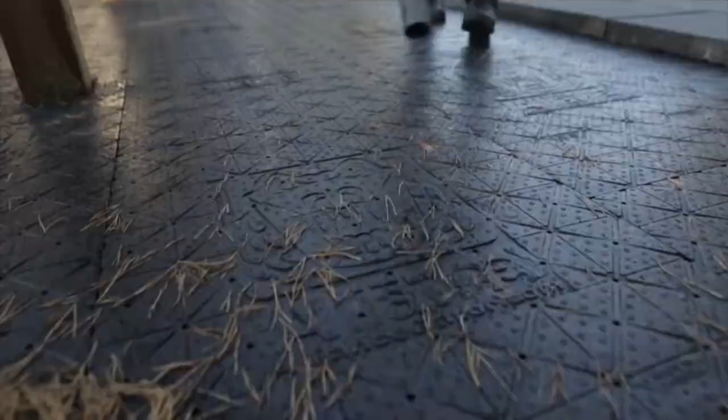All right, I can't get enough of that video, it really pumps me up. But this whole 4 equals 5, Mike, tell us what that's about. Well, Gator Base is a game changer. We really feel that you're going to save tons of time when doing a Gator Base installation. So the work that you normally did in 5 days, you can get done in 4 days if you use Gator Base.

Yeah, so 20% labor savings with Gator Base. That's really the wow factor in Gator Base. Let's talk about really how we get to that labor savings, so talk about the concept. Well, it's really simple, Gator Base replaces 6 inches of crushed compacted stone base material. So you're not digging out all that soil. Yep, you're not bringing in all that crushed stone. Awesome, and I think we got a cross section here, if Ryan will bring that up on screen, I think this will better explain what you're talking about here.

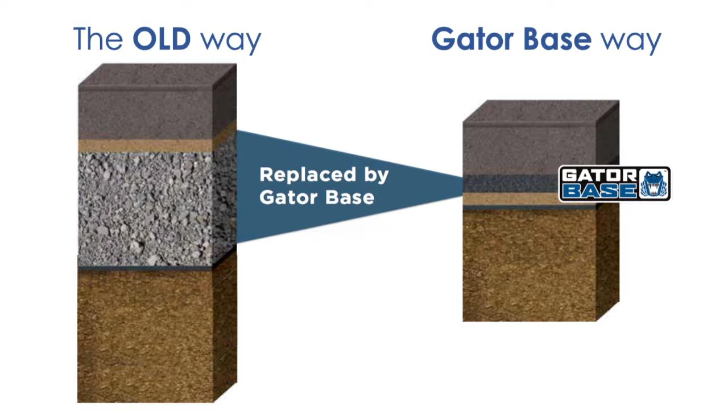Right, so now we've got a foam board that is going to give you load distribution. It's going to give you an insulative value. It's going to replace that crushed stone for structural purposes. So now we don't need all that rock underneath our patios to support that and give it a long-lasting, settlement-free type of installation. Awesome, so we've got that, and we'll talk about some other labor savings time, but we're really talking about saving you labor on a job site.

And the concept also extends into that load transfer. Right, we want to spread that load over a larger area, right? You step in a wet, soggy, swampy area and you sink in. But if you stepped on a 2-foot by 3-foot Gator Base panel, you wouldn't sink in. It's kind of that snowshoe effect. So the ground doesn't feel quite as much of a force as it normally would. Yeah, and so that eliminates a lot of excavation, a lot of labor, and leads to ultimately faster jobs.

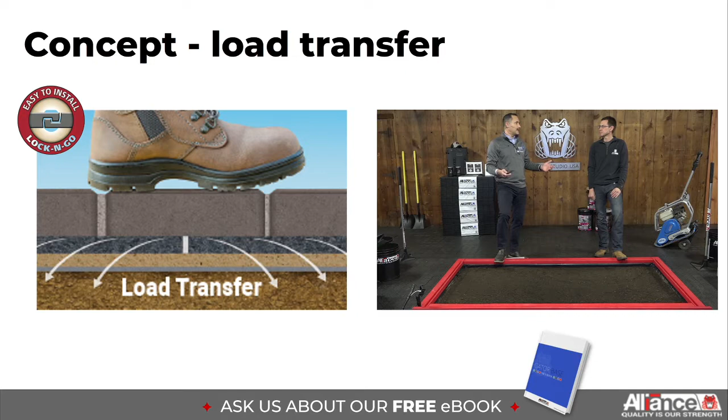Another great benefit of Gator Base is the insulation factor. Gator Base is foam, and foam is a great insulator. What causes movement and problems in our installations? It's typically freeze-thaw in these northern climates. So if we can minimize the number of freeze-thaw cycles, we're going to come out ahead. Less movement, less potential for frost heaves.

Gator Base has an R value of 3.6 per inch. That's equivalent to 16 inches of crushed stone. That's a lot. So you get a great labor savings, plus you get the added benefit of insulation. So you ultimately get a better installation. Not only is it a faster installation, but it is truly a better installation. We've got millions of square feet in the ground, no callbacks, no problems.

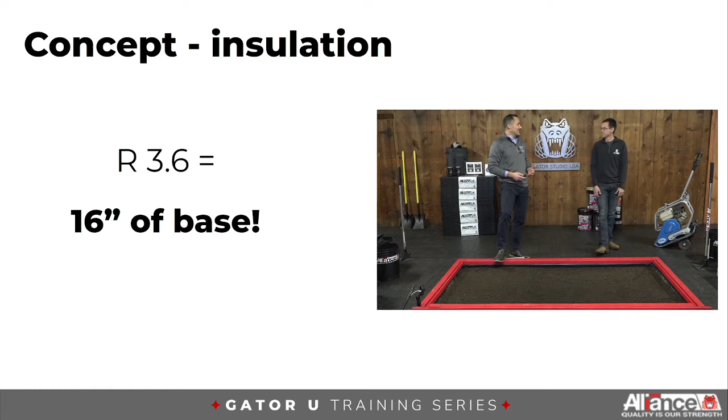It really is a simple, fast, fantastic solution for installing pavers. Well, enough about the concept. I think a lot of people want to see how it really works, so let's get into that installation process. Well, that's the beauty of it, it goes really quickly. So what do we need to talk about? Where do we start? Well, we're going to start with our excavation.

The first thing you got to do on any project is dig a hole. Okay, so we've got a hole here dug. Mike, what are the lookout or watch-outs we have to consider during the excavation phase? Well, I know contractors, they love to go out there with their skid steers and excavators and dig 12 inches, 6 inches, without even thinking about it. Way too much. We only need 4 inches. So have a little bit of care as you go out there. Don't over-excavate, that's probably our most common problem.

If you over-excavate, you can't just compact that leftover soil. You need to bring in some stone and compact it. So pay attention to your grades, and really, you're only taking off the sod, the top layer of grass and root mass, and you're ready to go.

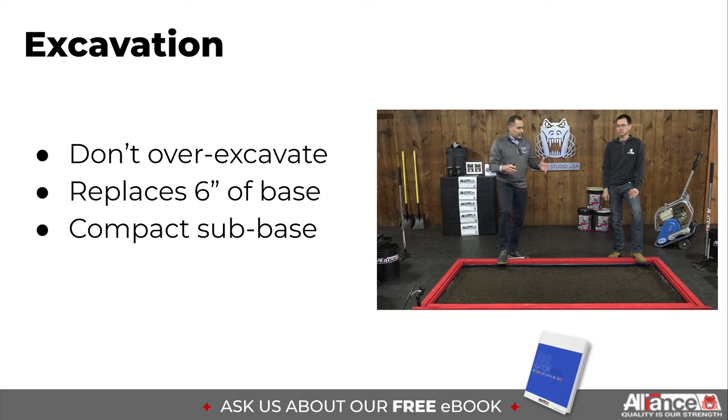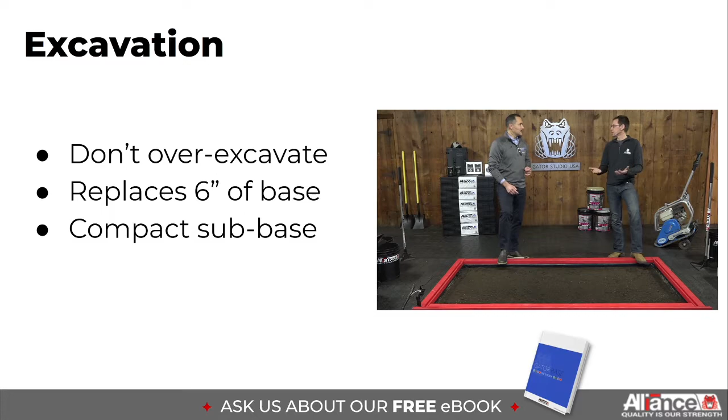Now, I know we talk about this product being amazing, but a lot of guys might find some grades and other issues here. Anything we need to do to correct grade changes? Yes, you can't just take that dirt you dug out of the high side, throw it on the low side, and expect that you're going to compact it and it's not going to settle. Typically soil fluffs up when you dig it out, so you need to bring in crushed stone to build up the low side like you would on any other project.

So this is a great product, but it's not a miracle. I can't make up 12 inches of grade change with Gator Base. And by the same token, if you would normally dig out 2 feet of nasty clay soils, amend the soils with Portland cement, put in number 2.5-inch clean stone, and build up from there with 2 feet of base, Gator Base isn't going to fix that problem. You got to be reasonable.

The general rule of thumb that I always tell people is Gator Base replaces 6 inches of compacted gravel. Like Mike's talking about, if you got to use 20 inches of compacted gravel, Gator Base is going to replace 6 of those.

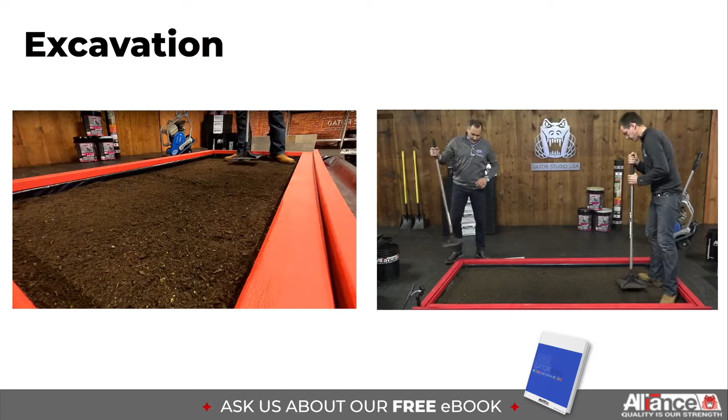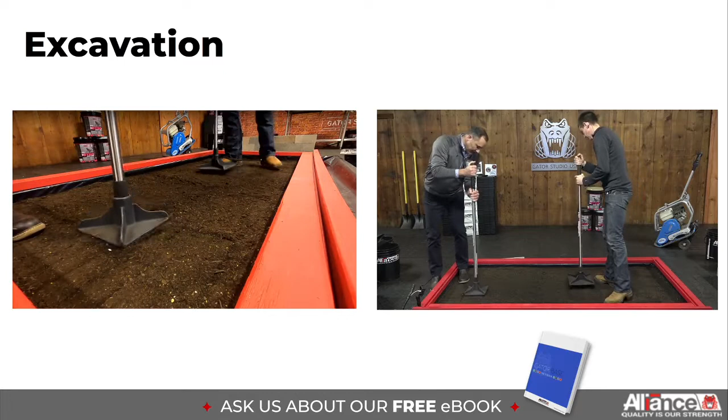So Mike's getting started here, I'm going to join him. Now the first thing he's talking about here is compacting your native soil. So we're going to compact here. We've got some hand tamps here for the purpose of this indoor demo. But Mike, you're not going to do this on a real job, what kind of machine are you going to use? A regular plate compactor, of course. So we're just going to do this here for demonstration purposes.

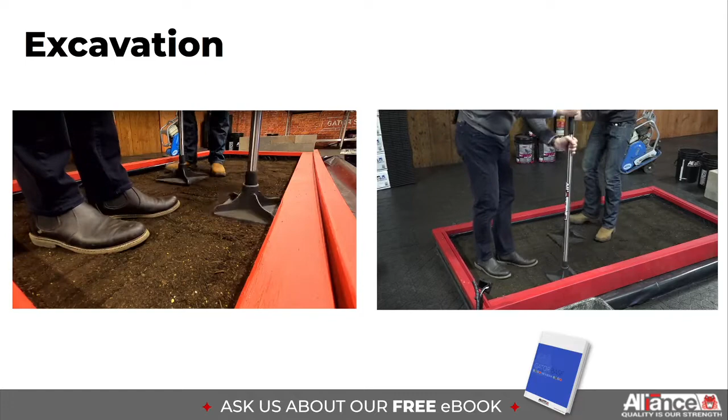A couple things to keep in mind: pay a little bit more attention to your excavation, you want to be a little bit tighter on it. Normally you're filling it up with crushed compacted stone, so if you're plus or minus an inch or two, it doesn't really matter. But with Gator Base, our setting bed layer is only an inch thick, so we want to make sure that excavation is pretty tight with the tolerances.

So after we compact the subsoil here, I'll give you the GF 4.4. So we're putting in a non-woven fabric.

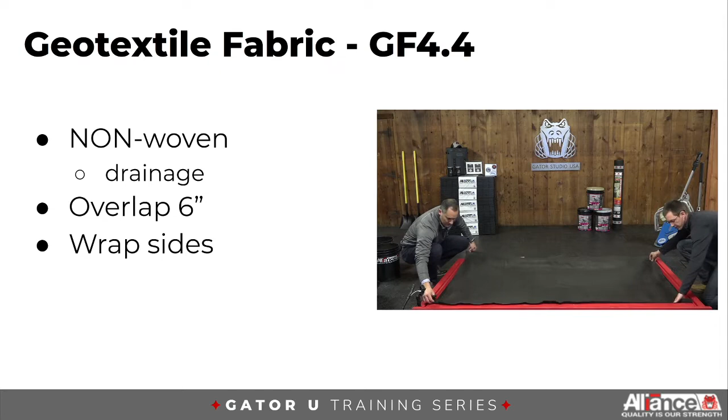That is a very important distinction. We want a fabric that's going to drain, allow water to pass through it freely, so you're not using a woven fabric. Woven fabric's like putting a blue tarp underneath your project - no draining on a blue tarp, you're just holding water. So with any project you're doing with fabric, you want to work from your low side to your high side, overlapping so water runs on top and not underneath. Make sure you're wrapping up over the sides of your excavation, up a concrete curb, up the foundation of a house. That's going to prevent that bedding sand from migrating out and washing out underneath your project.

So all sides would be wrapped like this for our demo here. We're wrapping this for show, and then you just cut that off after you're done with the project. Exactly, it gives you a long-term performance guarantee there.

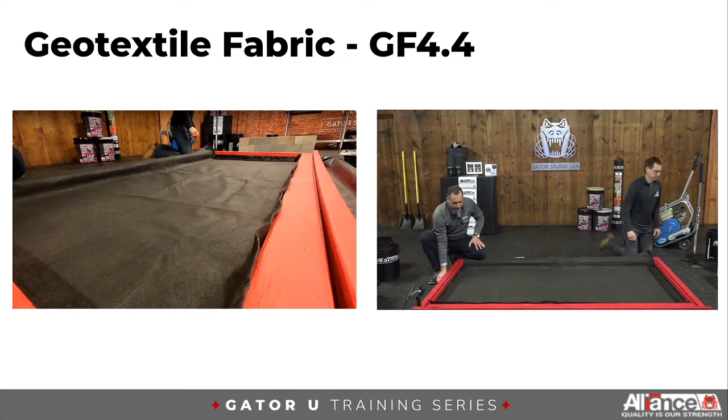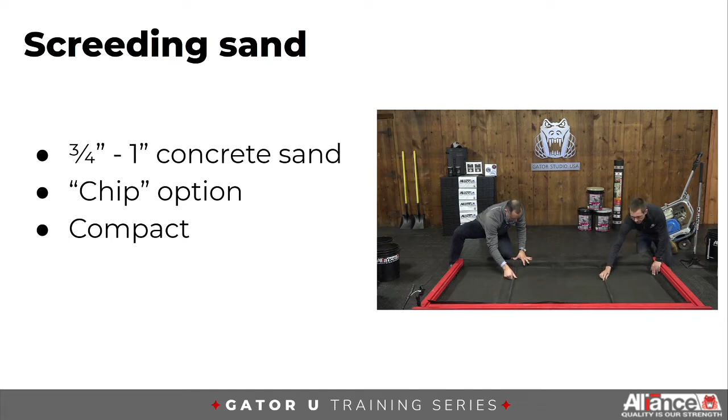Great, all right, so we got the fabric down. Next step here is we've got to screed some sand - we're ready to put in our bedding layer. Our bedding layer could be sand or it could even be chip, and we'll show that to our audience here shortly. But the one key thing is that we only want an inch of bedding material, not 3 inches. We want it to be a consistent amount - you don't want 2 inches of bedding material in half the job, tapering to a half inch in another part of the job.

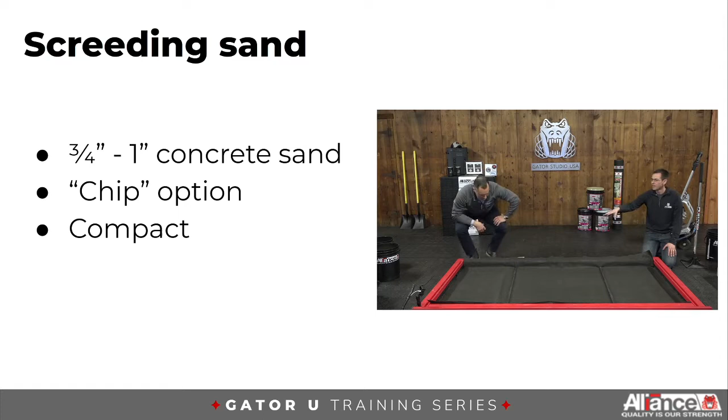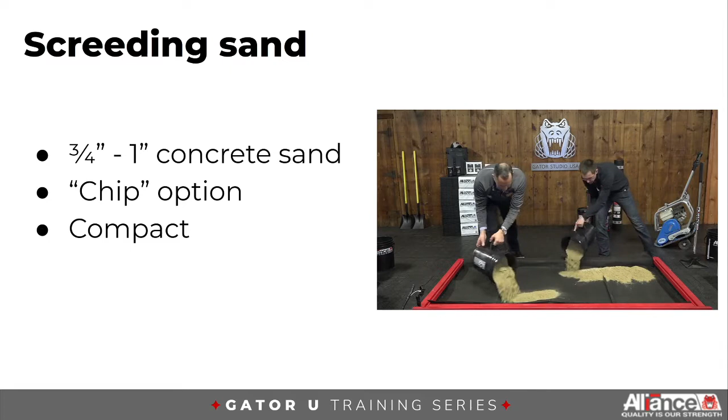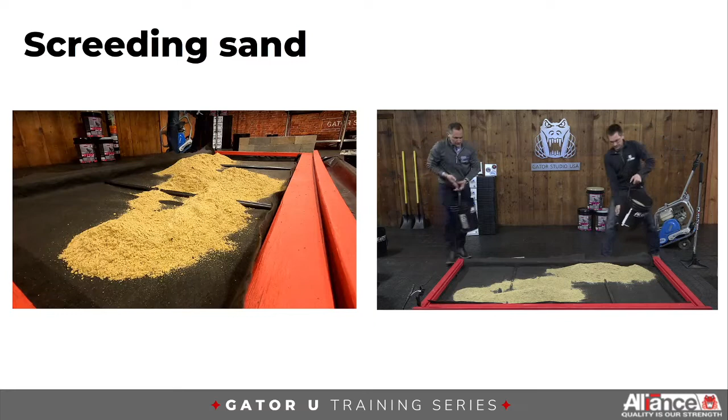On this project we're going to use some sand. That's probably the most common bedding material used for Gator Base, and that's going to be an ASTM C33 concrete sand - not masonry sand, not play sand. It's a sand that has a great gradation and packs well. Your other alternative is to use chip, and we'll show that here in a minute once we get started. So we're going to just screed this out, get a nice, even, consistent 3/4 inch layer here using 3/4 inch iron pipe.

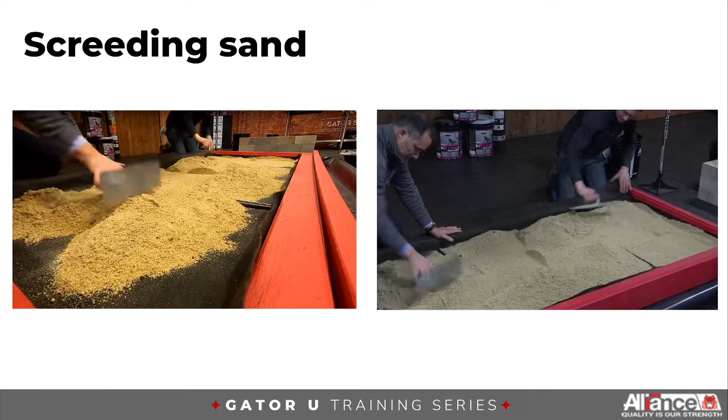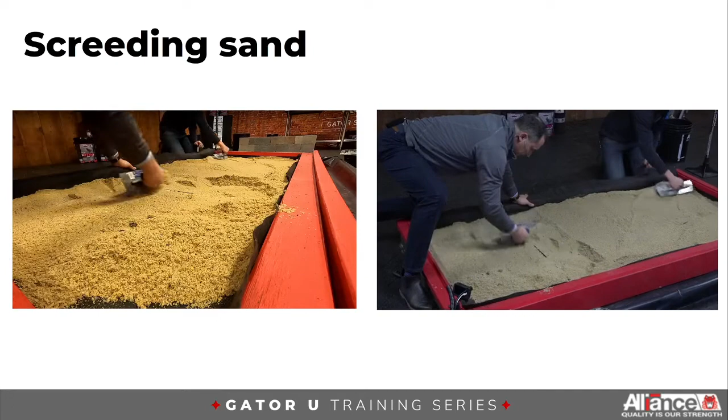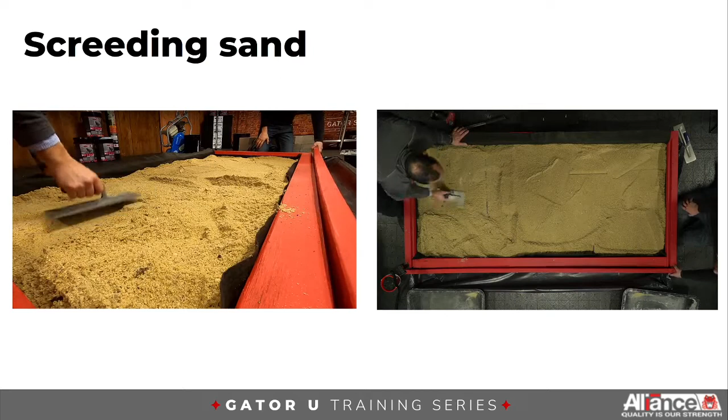Screeding the sand, I think, is probably one of the most important things to watch out for. I see oftentimes people cheating - that 1 inch is really key. We don't want to cheat that sand layer, otherwise we could lead to problems down the road. It also helps to have a little bit of moisture content in your sand - make sure it's not bone dry.

All right, let's just go over that one more time. Ready? Hit it. All right, so we're going to work on pulling the excess material out of here.

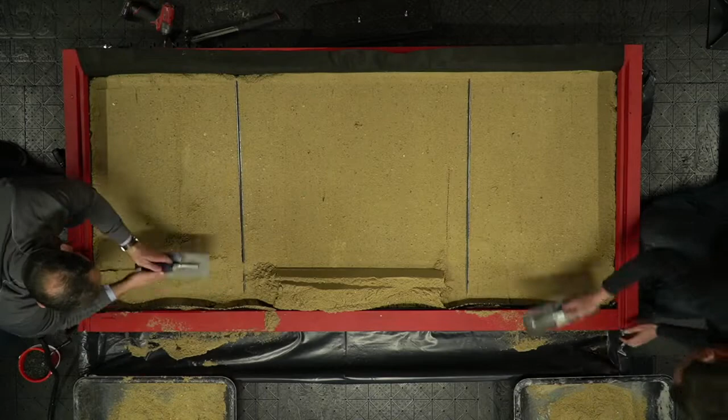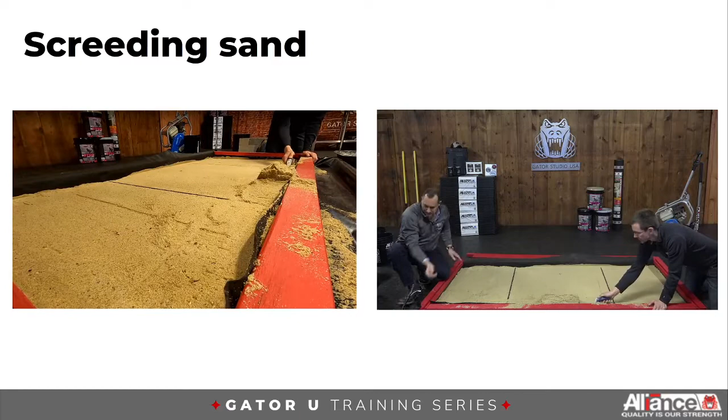Now the next discussion point would be sand versus chip. There's no structural advantage to using a stone chip, but there are definitely some job site efficiency and practical benefits to potentially consider using chip as your setting bed material instead of sand. I'll show us what we're talking about with chips here. If we could get a nice tight shot of what these chips look like - Mike, talk about the gradation with these chips.

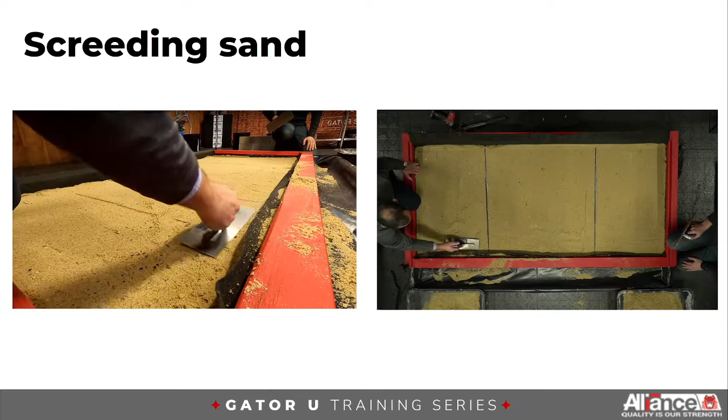So what we'd want to see would be an ASTM number 9 stone or even a number 8 stone - that's a 1/4 inch or 3/8 inch clean chip. We're not talking about stone dust or screenings here, but a clean chip. And you would screed that out exactly the same as you saw us do the sand here. Now, a lot of guys are really grabbing and latching on to this idea of a chip setting bed because it's fairly easy to work with. You can work in rainy or wet weather a little bit better than sand, and there's less compaction needed.

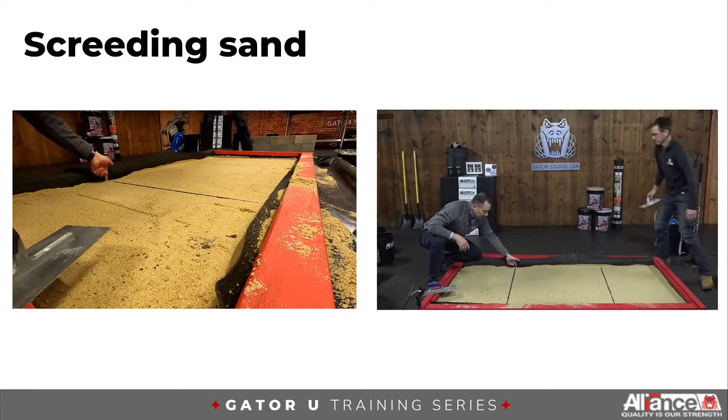I love the idea of working in rain and the compaction thing - another time saver just to kind of speed things up. So I think that's why chip is getting a lot more attention now and becoming more of a popular trend. So our next step here is to actually go ahead and do some compaction once we fill in these screed pipe voids. Now, we do recommend compacting the sand setting bed here.

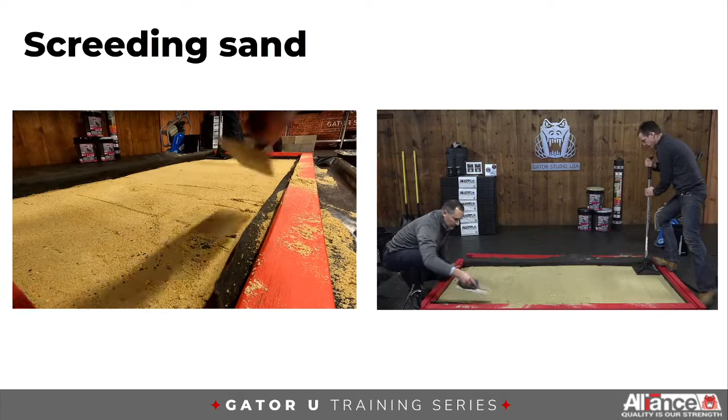If you did chip, you wouldn't have to do this step. Admittedly, compacting a sand setting bed isn't the easiest thing to do. If you have a small project, you can go at it with a hand tamper - it's not too bad and fairly efficient. If you're working on a larger project and you put a plate compactor onto your sand setting bed, you'll throw up ridges in between each pass, and make some pretty good divots wherever you turn. So yeah, it's tricky.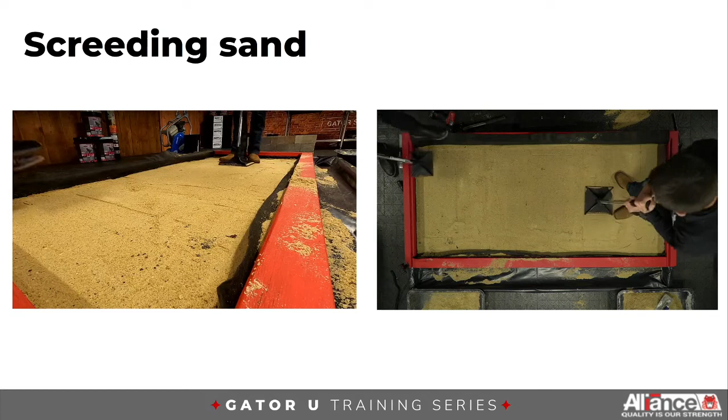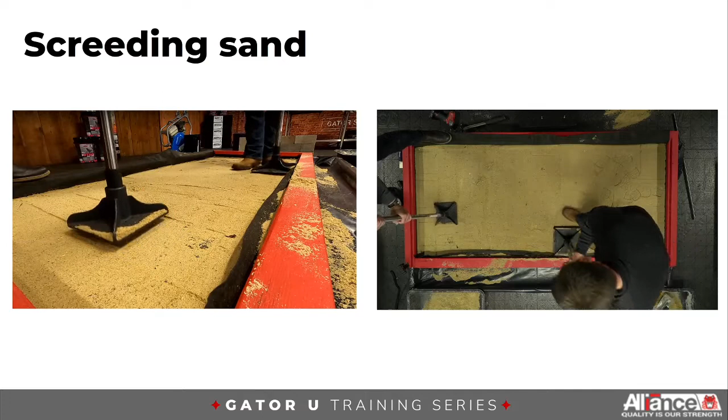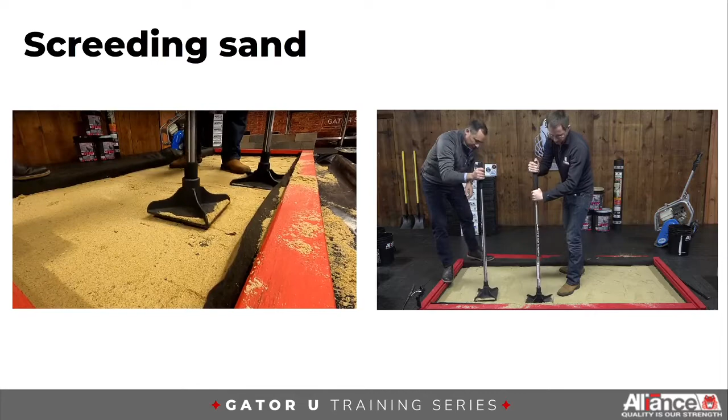You may want to consider what a lot of our contractors who use Gator Base regularly are doing, and that's to simply put the Gator Base panels down on an uncompacted sand setting bed, then account for about 3/16 to 1/8 of an inch of settlement when you do your final compaction of your pavers on top of the Gator Base. And I think you mentioned the moisture content's going to be big - when you run a true vibratory plate compactor on this, that moisture content is really going to make a difference in terms of the ease or the ability to compact, right?

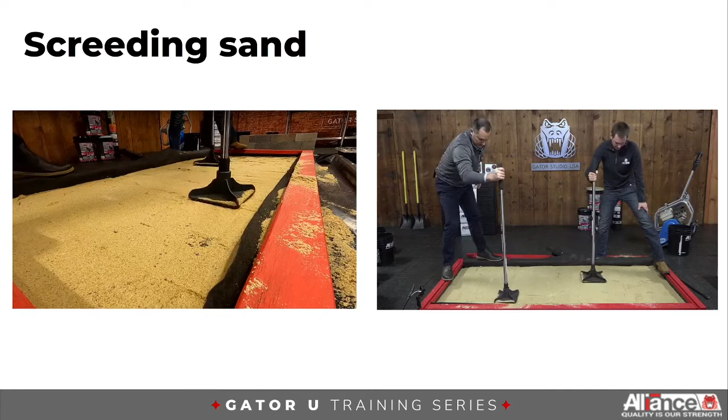Right. So now we have a very consistent, very even 3/4 inch layer of concrete sand. And with that, I think it's time for Gator Base, right? We're ready for Gator Base.

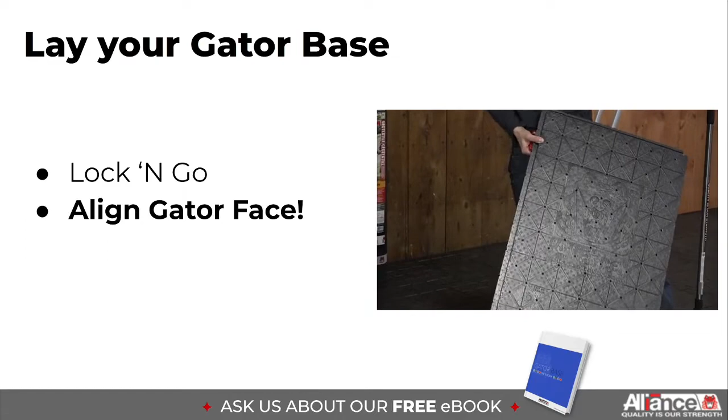Could I see one of those Gator Base panels, George? There you go. So a couple things to note real quick before we get started. The Gator Base panels are approximately 2 foot by 3 foot. They have an interlocking tongue and groove edge, so each panel latches into the panels adjacent to it. That's really important - we don't want these panels to shift underfoot, move underfoot, lift off and get blown away, so the interlocking edge, which is unique to Alliance's Gator Base product, is key.

We have transverse and through drainage. That means that water is going to move laterally across the surface of the Gator Base, make it to these holes, and drain right through, into that sand or chip setting bed layer, and out of the project.

Good. And then I think the one question we always get is how do you cut it? Well, that's a good question, George. You might think the Gator Base is going to be hard to cut - it's a pretty tough material. I can bend it, it doesn't snap. All you need is a utility knife - give it a little slice, and snap the Gator Base right off, kind of like cutting sheetrock. And you can do a nice radius there if you're doing a serpentine walkway or something like that.

It'll snap down in there. And that Lock 'N Go is really unique because, like Mike said, unique to Alliance, and can really see - is a huge advantage for us. See, the panels are not shifting or moving underfoot. I can walk on top of the surface here.

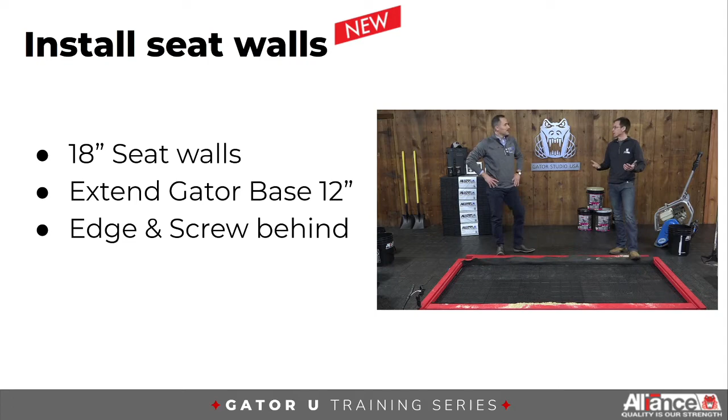Gator Base has been around for a while, and we've done quite a bit of testing with it. We're confident enough in the performance of Gator Base to now endorse a seat wall application.

So before, you'd do a patio, you'd have to do your cutouts, pre-plan your seat walls, excavate traditional crushed stone base, build your walls, then bring your Gator Base into it. Now, seat walls up to 18 inches high and 12 inches wide can go right on top of the Gator Base. Huge benefit, big advancement for us.

Now, are there any restrictions on this when you do a seat wall? Well, there certainly are. We talked about that overall weight. So Gator Base is a great product, not a miracle product, but in most soil conditions, as long as you don't have something completely unsuitable like organic or clay material, you're going to be able to build that 18-inch high by 12-inch wide seating wall.

You can see where this is getting placed on the project. We want to make sure that we have 12 inches of Gator Base that extends past the outside edge of the wall. That's going to help support the wall and give us enough room to put our edge restraint to keep it from moving around.

So 18 inches, that's the limitation we're saying due to our testing and the load capacity. But you can go right on top of the Gator Base, and that's a huge advancement to really speed up the job. Right, and then you're simply going to take your edge restraint. You can use the Gator Rigid or Flex Edge, or the new Gator Extreme Edge concrete edging product.

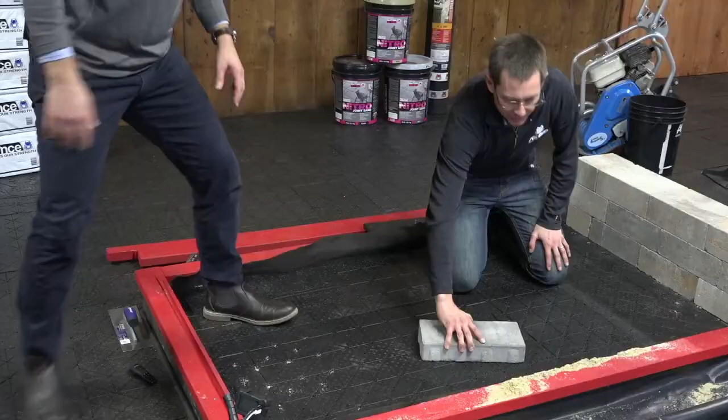All right, so let me get ready with some pavers here. Now we can slide pavers right across Gator Base, so we're not bending over to click and drop all day long. We can take these, especially this bad boy—oh, that's even small these days, they make pavers much bigger than this. It's crazy, isn't it? And I really wouldn't want to bend over all day laying 18 by 24s.

No, God, no. And this is an easy little sandbox, but I can only imagine laying, say, 5,000 square feet or even 1,000 square feet. I could now stage these pavers at the laying face so they're ready for you. Walking all over the sand setting bed, you couldn't do that. Right, you can pile them up in front of me. I can be ready to go and very, very quickly lay my pavers.

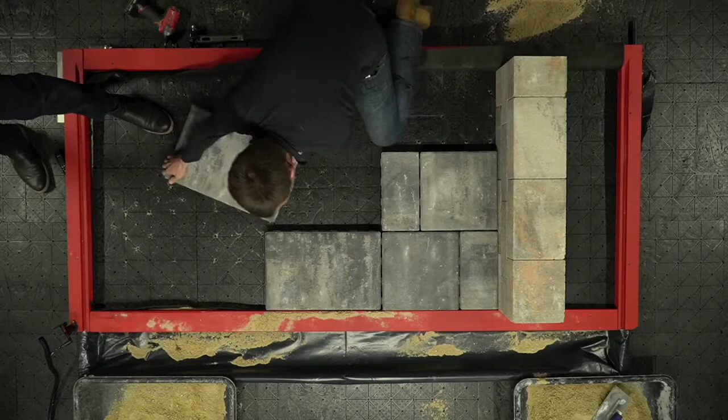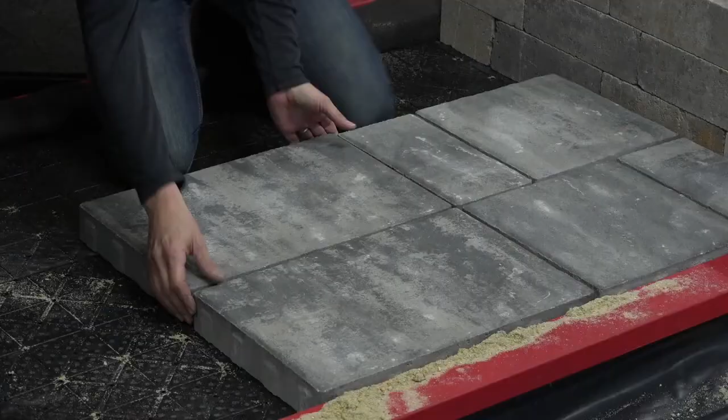So hold on, I just want to show you guys something real quick here. You're laying your pavers, all of a sudden you realize, hey, I've got 4 corners here, too many bond lines going. That's a little bit of a pain on a traditional install—you pick it up, you've got to fix that sand setting bed with a trowel, you've kind of crushed it in certain areas. But on Gator Base, it's a very easy fix, quick fix: slide it out of the way, pick it up, slide this back into place, and we're ready to go. So adjusting bond lines, swapping out pieces is very, very simple.

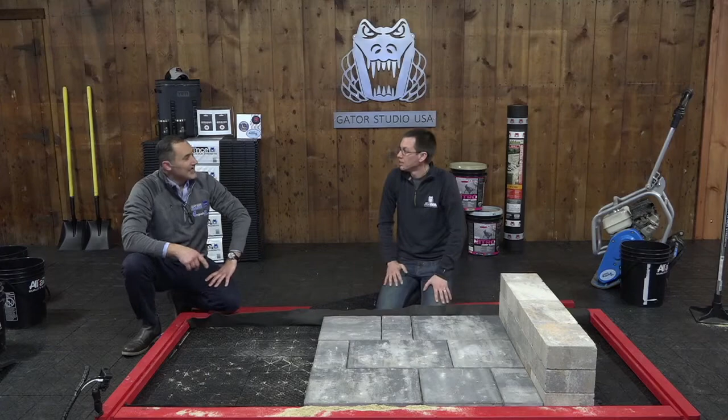I think what guys are telling us that are using Gator Base, they love the excavation savings and all that, but they're telling us it's 50% faster just laying pavers. It's really amazing. We pitch that excavation savings, you're not digging out 6 inches, you're not bringing in 6 inches of stone, but I think half the benefit is just how quickly you can lay pavers. It really is unbelievable.

So, good. All right, we've got a great finished paver surface here. We're ready to do edge restraint and then sand it off. Absolutely, so let's get into the edge restraint now.

All right, so we've got a piece of edge restraint that we will attach here on the edge of our pavers, but before we do that, I just want to give you a quick little demonstration. Our edge restraint, plastic edge, goes directly on top of the Gator Base. Now, historically, how do we put plastic edge restraint in?

You're going to hammer it in with a spike. And what happens 2 years after you hammer that spike in, or maybe even faster? It often works its way out. So now the spike's coming out of the ground, the edge restraint's coming out of the ground, popping up beyond the height of the paver. It looks terrible, and it's not performing its intended function. Looks is one thing, but structurally it starts to weaken the whole system.

Exactly, so Alliance has a better answer for you. We're going to mechanically attach the Gator edge to the Gator Base using special screws that actually expand and clamp the Gator edge to the Gator Base forever. If you take a look at these real quick, we've put some screws through here. We're going to send screws out when they order those. Screws come 50 in a box, and we'll give that a quick demo.

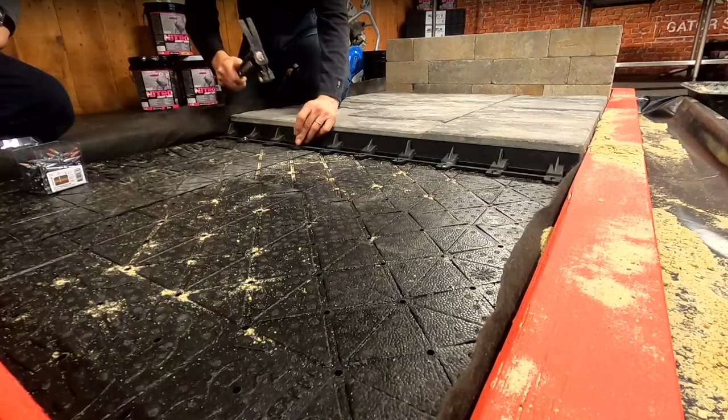Yep, exactly. And if you're doing it for real, it's quite easy. Every other hole, you just pop your Gator screws right through, and then have somebody follow up with a drill or impact driver and just screw them in a little bit to lock them in place.

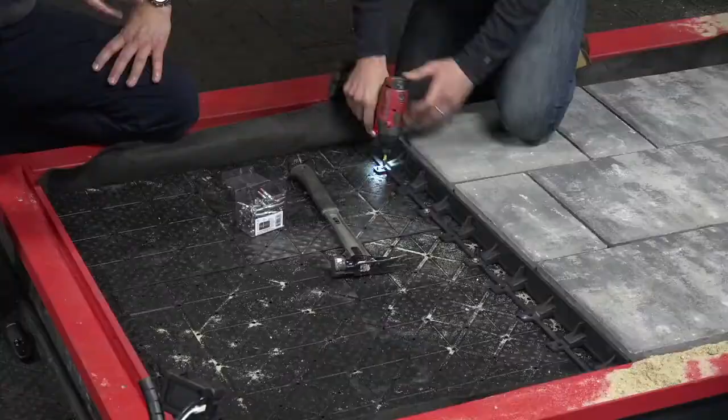This was a huge advancement too. I know when we first came out with Gator Base, we were using the spikes, and that was one of the questions that we got from ICPI a few years back. Then we introduced the edge restraint with the Gator screw system, and they loved it. Yeah, they were blown away. Just the strength of that connection, the prevention of any possible lateral movement is amazing. It was great. I remember talking to them in Montreal at that meeting, talking to their construction committee, about this possibly being a better edge restraint system than traditional paving stones with this Gator screw and edge system.

Definitely. You know, the Gator Base system itself is kind of like a floating hardwood floor. You take all those floating hardwood floor pieces and stick them randomly on your floor, they're going to move all around when you walk on them. But once they're all interlocked, snapped together, the system's finished, you would never know it's not a 2-inch thick solid oak hardwood floor.

Yeah, absolutely, great. So this would complete the install. Obviously, we would have to do the joint sand. Next week, we've got some great programming coming up on our G2 joint sands, polymeric sands, that we'll discuss next week. But this would be it for the installation, right, other than the joint sand. As you can see, Gator Base goes very quickly. And I'm not even an installer for a living, just a sales guy, and this was a quick installation.

All right, do we have any questions that have popped up? Let's pause and see if we have any questions here from our audience. First question: can you lay Gator Base on top of frozen ground? Well, that wouldn't be ideal. Frozen ground has probably swelled, right?

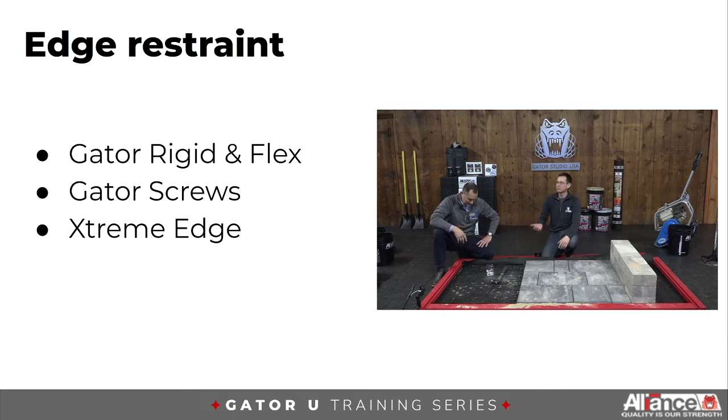There's moisture content in it. It's frozen, it's swollen. So you would not want to put Gator Base down on frozen ground or frozen soils.

Best bet would be to wait for it to thaw out and get it into place. That idea of using the chip for your installation certainly could extend your working season a little bit, right? If you can get your excavation done and get your chip in there, you don't have to worry quite so much about weather type events.

I always tell people Mother Nature is pretty powerful. So if it's freezing and thawing and you're in the middle of that, it's probably not an ideal time to do the work. But with Gator Base, it does give you some flexibility to extend that a little bit.

If your hole's dug and you're ready to go, Gator Base is a quick, easy way. You can do it in the rain. You could do it in snow if you're crazy enough. But you still have to be careful of that freeze-thaw movement in the middle of an installation.

And if you had your Gator Base down, it might protect the ground like a frost blanket to some degree. Absolutely. Good. Any other questions, Rick? What else we got? I got a couple more in here.

I am using natural stone pavers. The architect wants 3/4 inch tubing. Your spec calls for a 1/2 inch sand bed for natural stone. Can I add an additional 1 1/4 inch to cover the tubing? Will it still drain? Well, you definitely want to minimize the amount of sand or chip that you have on a Gator Base project. We don't want to have that much going on top of or underneath Gator Base. Typically that 1 inch is a maximum we'd like to see you stick with.

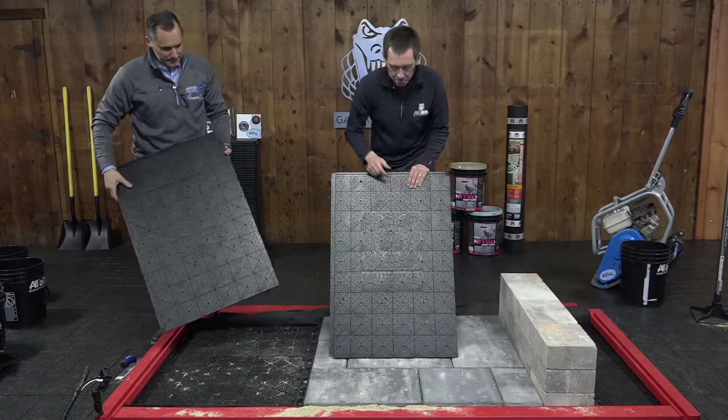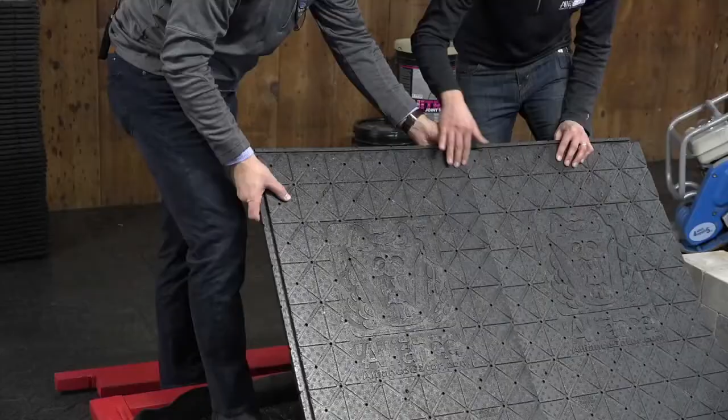Can you elaborate a little bit on the Gator face head orientation? Absolutely, certainly. Let's get that down - if you take a look at this, the Gator heads are present on both sides of the panel, but they're actually in a different orientation. So if I flip that over, the Gator head's vertical, now it's shifted to be horizontal. When we put these panels down in place, if the Gator heads all line up in the same direction, then that tongue and groove edge matches up. If the Gator faces are not aligned, your tongue and groove does not line up. So once your crews get used to working with this, they will actually very quickly start handing their guys the next piece in the right orientation just from looking at it, and Gator Base goes down incredibly quickly.

I mean, you're probably talking 20 minutes to do 500 square feet. Absolutely. And that's one of those things I always talk about - the example of if you buy a barbecue grill and have to put it together, it takes you the whole weekend. Your next door neighbor comes along and buys the same grill, you help them out, and you're done in 2 hours or less.

Call your Alliance rep. Your Alliance rep can help you with these little tricks on your first install to make sure that installation goes smoothly. So how are we doing on questions? What else do we have here?